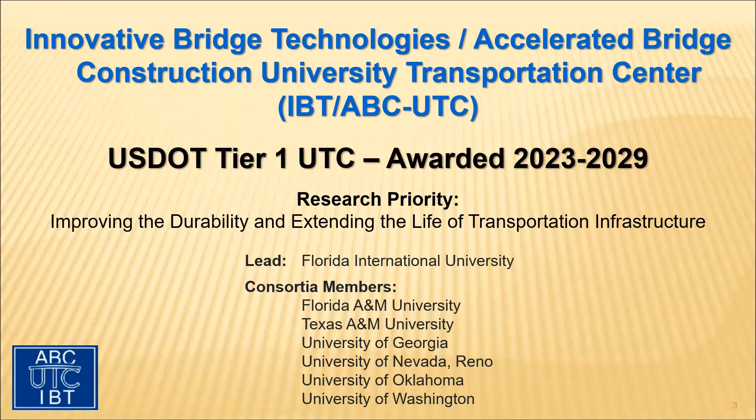Thank you, Mary Lou. It's truly been an honor and a privilege to be joining the UTC. I'm really looking forward to working with Atorod and his all-star team. It's going to be great people to work with. And I want to really thank Mary Lou. I can't thank you enough for the work that you've done on establishing this solid framework for the Technology Transfer Committee. Many of you have been watching these webinars with me for the last decade, and it's been a great benefit to so many of us. So thank you again, Mary Lou.

Today I'm standing in for Atorod. He actually had a travel conflict. Many of you who've been on the webinars for the past few months have noticed that he has been discussing the changes to the format of the ABC UTC, introducing that the IBT, the Innovative Bridge Technology, is being added to the scope of the UTC.

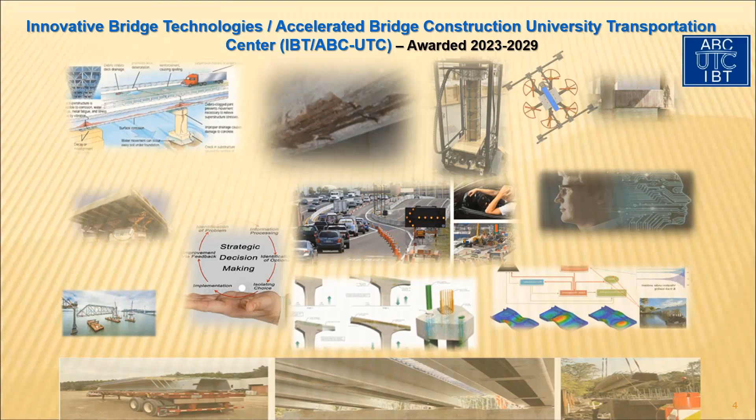In the coming months, he's going to be further discussing these changes to the format and the addition to the breadth of the scope. As you can see from many of the photos on this slide, there are some exciting topics coming up on the horizon. So in order for us to keep these webinars vital and beneficial to you, we need feedback on what you'd like to see on future webinars. If your state or organization has been implementing IBTs that could benefit others, please let us know so we can disseminate that knowledge. And if you have ideas for future topics, forward them to Atorod at the email address on the screen.

We really do benefit from getting those ideas from you, so please do send those if you have them. I'm excited to learn about those advancements and to share them with you through these webinars and also through other communications, such as the research webinars and conferences. So I look forward to working with all of you, but now I'll turn it back over to Mary Lou.

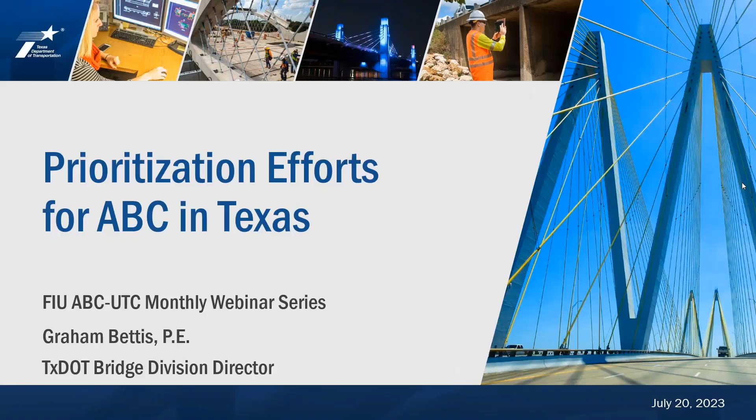So really, I just have some opening comments for the most part. Bernie's going to really get into the meat of this, but just to open the topic: the owners get really excited about breaking ground, because so much work goes into getting a project ready with utilities, environmental, design, and everything else. So when we finally get to breaking ground, that's a celebration for us. The public doesn't care about breaking ground, they care about cutting ribbons. So we've tried to find ways to get to that ribbon cutting, even on standard bridges, a lot faster than we have in the past.

We've been talking ABC for a long time now, over a decade, and I think in that time we've got a lot of momentum. There's been a lot of progress. We're doing it more often, but I think there's still a need for wider adoption, especially on more standard projects. We're not going to talk a whole lot today about lateral slide-ins and some of the really big stuff. Bernie will touch on some of it, but our focus has been on how do we accelerate pretty standard bridges, and that's been a lot of what our efforts have gone into, and even beyond our efforts, what we're trying to make policy in Texas.

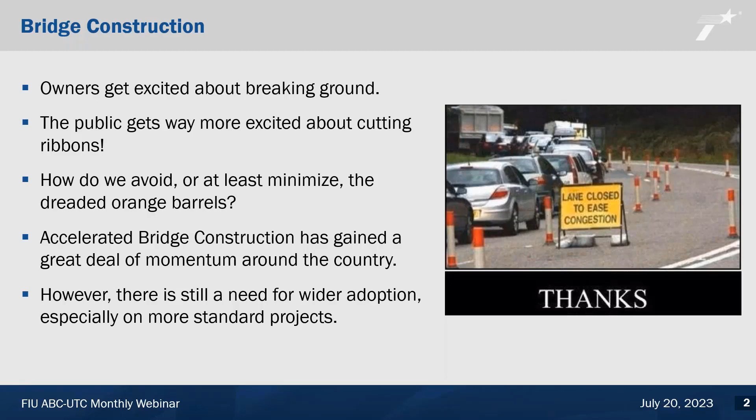So the ABCs of ABC. What are we talking about here? Speed, obviously, it's accelerated bridge construction, so that's first and foremost. We're trying to speed things up.

But I think a couple of things we maybe don't talk about as often as we should when it comes to ABC is quality. TxDOT relies very heavily on prefabricated elements, whether it's precast concrete or structural steel or whatever other widget we can make in a plant environment. We've really maximized how much we do that, and we've got really exceptional oversight and quality control in those plants, and the quality is great. Something goes wrong in the field with a cast-in-place application, it's really hard to come back, and we're forced to take something that maybe isn't as good as we hoped. Whereas in a plant-produced girder, if something goes wrong, we can scrap it and start over.

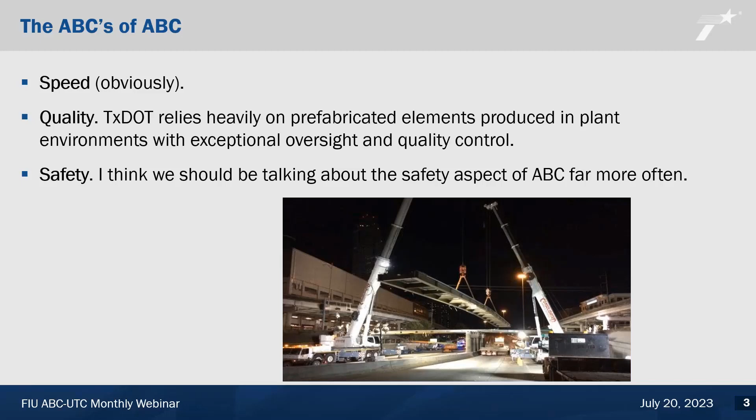And then that third topic, definitely one I don't think we talk about often enough, is safety. Everybody knows what happened with COVID—everybody decided they were a NASCAR driver, driving way too fast. And just because COVID is over, that's one of those bad habits that stuck around. People are driving like maniacs out there, and that includes our construction zones. So it's putting the public in harm's way, and it's most certainly putting the contractors and inspectors in harm's way. I think ABC should be looked at as an opportunity to minimize the amount of time those guys are exposed to traffic. That's a huge part of ABC, and we just don't talk about that aspect as often as we should.

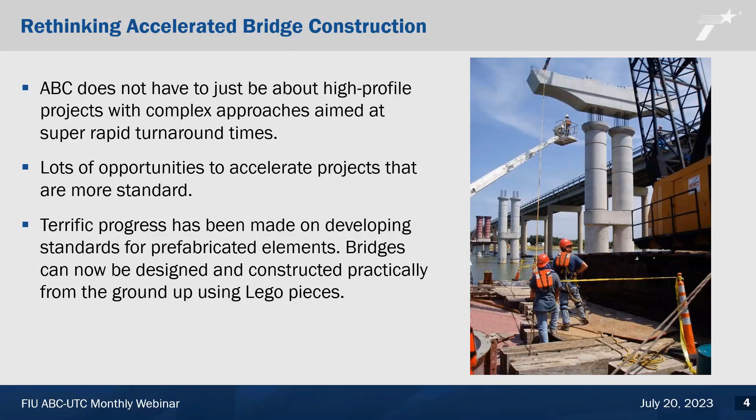Terrific progress has been made on developing standards for prefabricated elements all over the country, and we're at a point now where we can really design and construct bridges from the ground up using Lego pieces, whatever you want to call them. We've got precast column design standards underway, and we'll have those published, and at that point pretty much the whole bridge can be routinely designed and constructed using almost all prefabricated elements—primarily in Texas, that's precast. So keeping it simple: prime contractors in Texas have been very clear with us—keep it simple.

Understandably, with ABC, especially on those weekend closures or big projects, there's going to be some unusual stuff you have to do. But every opportunity we have to keep things simple, that's what we do. So even for accelerated construction, we utilize as many standard details and techniques as possible. We try not to get cute unless we really have to.

Something else we do is put alternates in plans, so we'll design a bridge 2 or even 3 ways and tell a contractor we don't care which one you do, bid it and make your decision. Another thing we do is allow contractors to come to us with their ideas. We really don't want to paint ourselves into a corner with these things.

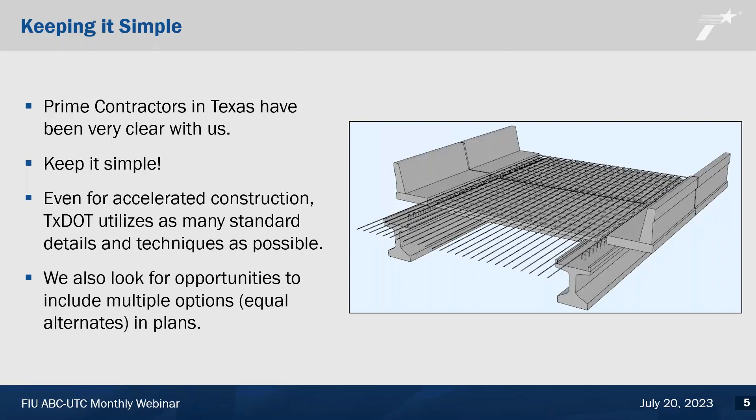A lot of times contractors will have great ideas on how to speed things up, and we want to be open to that. All right, so flipping the script—I'm not going to talk a whole lot about this because I think this is the bulk of what Bernie will be addressing, but it's interesting. I'm up in Portland, Maine this week for the AASHTO Committee on Maintenance meeting, and there were discussions this week about a couple of states that still think of ABC as just hugely expensive, and they don't do it because of that.

You know, we talked about the speeding with COVID. Something else that happened with COVID are the astronomical construction costs. The material costs are high, the labor costs are high, and the traffic control is just obscenely expensive. Just crazy what's happened with traffic control cost. So when we do a side-by-side, we're frequently finding that ABC is comparable, or in some cases less expensive. Bernie's going to show you an example today where ABC shaved millions of dollars off of one of our projects.

That second bullet—a lot of planners, a lot of owners just remain steadfast in their belief that at least one lane of traffic must be maintained at any cost. And man, it's hard to move some people off of that position. I've found it really interesting that there's a lot of cases where you reach out to the public, and they seem to be more open to the idea of ABC sometimes than owners and planners. So I think public outreach is critical.

There have been several instances where even working internally with TxDOT districts, they were very resistant to the idea, but we did some public outreach and found out that most of the time the public is very much on board with the idea of just ripping off that Band-Aid. If you can hurt them for a couple of weeks a lot instead of hurting them a little bit for 2 years, most of the time they're willing to take that couple of weeks.

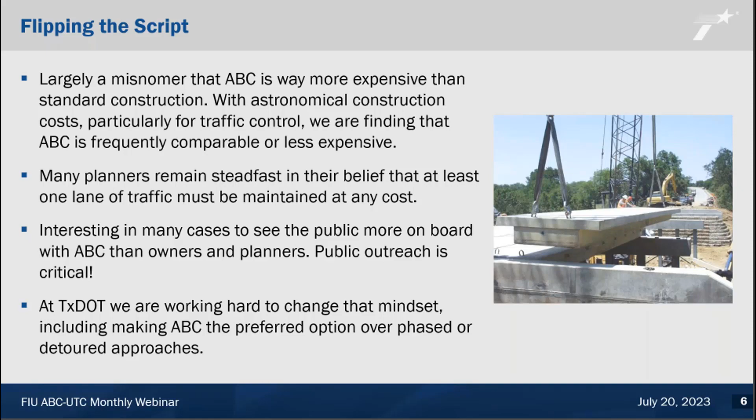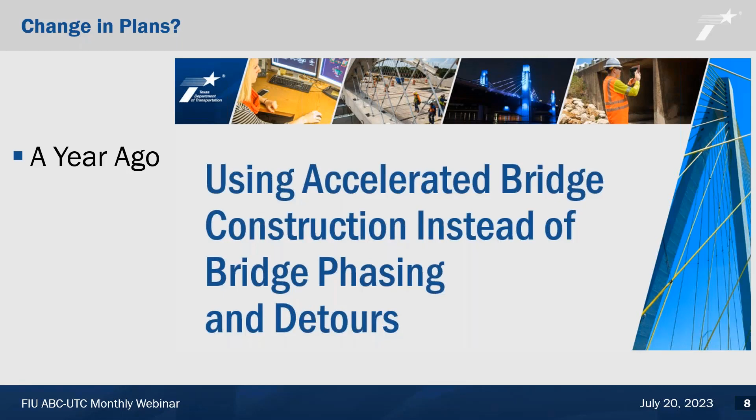So a year ago, or 8 months ago, as Graham just said, he mentioned using accelerated bridge construction instead of bridge phasing and instead of these temporary detours that we do. I would say that is definitely still the goal. I would love to get to a point where we are using ABC techniques to eliminate them altogether, but the truth of it is that we're probably just going to get to where we minimize bridge phasing and detours.

We're trying hard to identify areas where it makes most sense to eliminate these temporary detours, eliminate the phase construction, to where we can just close a bridge down completely, get our construction crews in there, have it closed, get in there with prefabricated elements and speed up construction as much as possible, but we're not there yet.

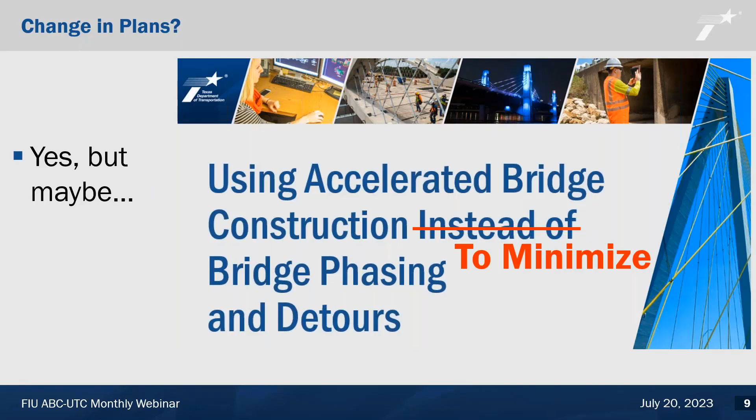As Graham just touched on, many of us are aware that temporary detours can be very expensive. Here's an example near Austin where this temporary detour is in place, and it's extremely expensive. Let me get my laser pointer here.

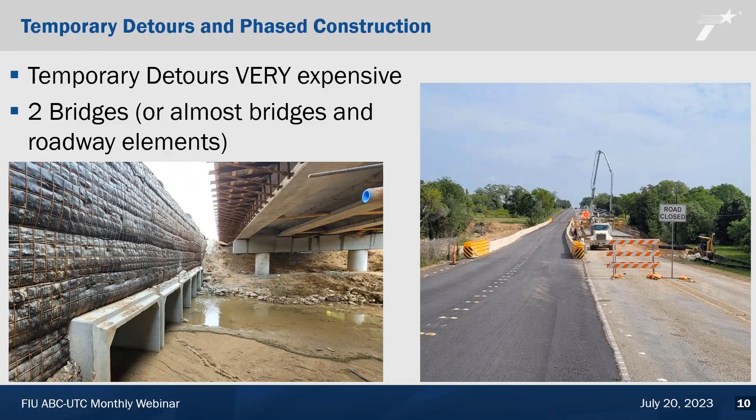We wanted to keep traffic open during construction and not interrupt traffic as much as possible, so we ended up having to create two bridge structures. We move all traffic over here temporarily during construction, build the actual bridge next to it, and later come in and tear this out. So we're essentially building two bridges, plus all of these roadway elements that transition traffic onto that temporary detour, and that can be very expensive.

Another thing Graham talked about was safety concerns. Here we have a horizontal curve that we're introducing just to get traffic off to the side and away from the construction. The horizontal curve itself is a safety concern. This is something we've been trying to communicate to our partners at the districts, and one of our districts is very concerned about it—it goes into their decision process very early in their projects. They want to eliminate as many of these as possible.

The other thing they always point out is that by doing this phased construction or temporary detours, we're adding the potential for right-of-way costs. That's adding a lot of risk to the district, and they have to build that into their project development—if we have to phase this, it takes a lot more time to acquire right-of-way, get those agreements in place, get the utilities cleared, and make sure we get the utility agreements in place. It's just a lot more work with this additional right-of-way and these phased construction temporary detours.

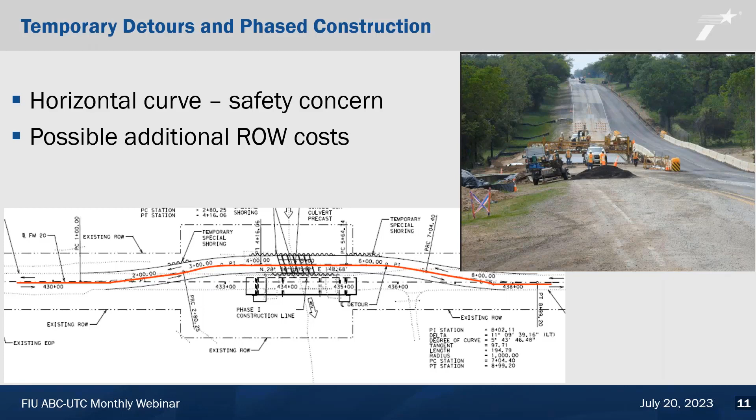So the phased construction is another way we try to maintain traffic on our bridges. It's not necessarily what we want to do, but this also creates a bigger footprint than a regular bridge—oftentimes we end up having to overbuild, building the bridges much wider than we actually need. That bigger footprint also affects how many utilities we might have to relocate, which is a risk our districts want to stay away from as much as possible. But by going with ABC techniques, we can avoid that.

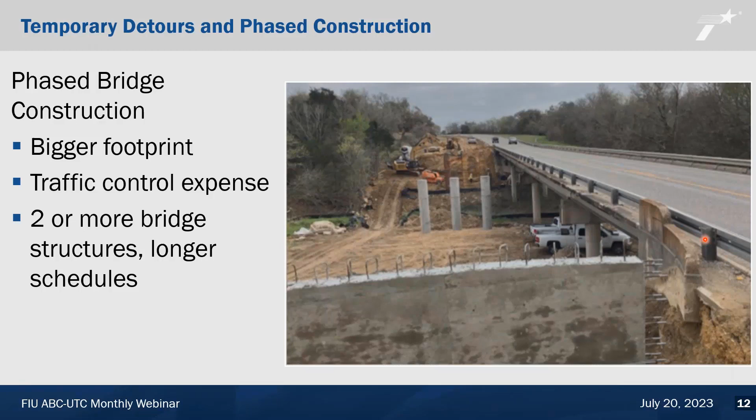Graham mentioned the traffic control expense. When we have these long detours and phased construction that extends for thousands of feet on either side of the bridge, with barricades up for months on end, that traffic control adds up quickly. We're also having to build two separate structures—here's the original structure, we come in with a second structure, then demolish the first and build the second. So we're having traffic control times two, which is something we're trying to eliminate in Texas as much as possible.

One of our districts brought up to me, while I was doing legwork for this presentation, that one concern they have is ride quality—they're afraid there will be construction joints and the ride quality won't be there when we finish the project. From the bridge standpoint, we haven't necessarily seen that on these projects, but it's a concern our districts have. We're definitely going to listen to them, and if it nudges them into the ABC realm even more, that's even better news for us.

But on another note on the safety end, there's the issue of narrow lanes.

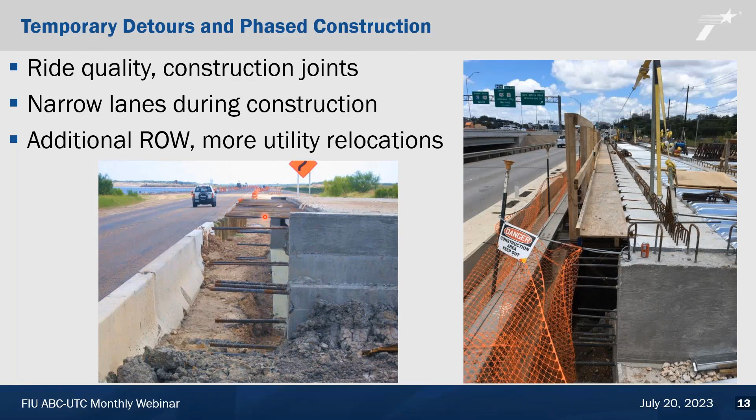And I've already touched on the additional right-of-way and relocations, but that's a much bigger consideration in these metropolitan areas. Here we have a more urban, metropolitan area, whereas out here it's something that can be more easily done.

So how do we get past that? We do ABC, right? You know, absolutely, that would be what we'd love to do. And what does that look like? Everybody always thinks of these big projects where you just move in these big bridge elements, and that's just great. We would love to be able to do that. I would just say that it's not something we do as often in Texas.

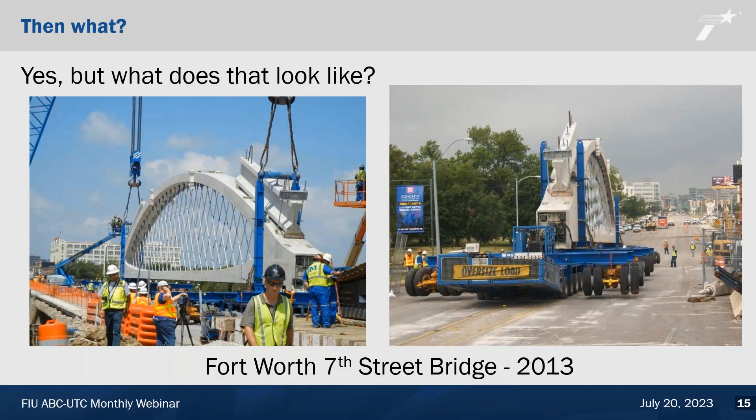This one, another one, is in Texas, but this is what we often get as a first impression from all of our districts, and even some of our staff here. When we mention ABC, this is the first thing they think of, and we're trying to change that mentality. Like, hey, look, this is great, but this is not necessarily all we are wanting to do to accelerate construction in Texas.

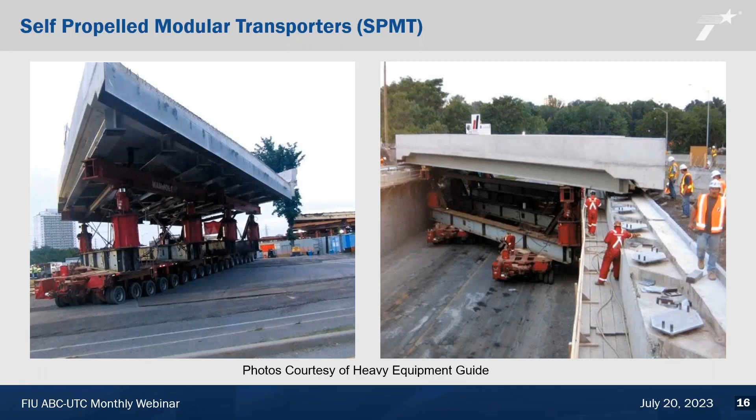West Dallas Street in Houston. This is an example of one we did back in 2016. We had a bridge get hit in downtown Houston. We had to close the bridge, it was so severely damaged. It ended up being that bridge was a major route that was going to be used by law enforcement and major other security people for the Super Bowl that was going to be held in Houston in February of 2017. So they kind of came to us, and I won't say a panic, but yeah, maybe it was a panic, wanting us to, hey TxDOT, is there a way you can get this bridge repaired and opened back to traffic before the Super Bowl is hosted here in Texas?

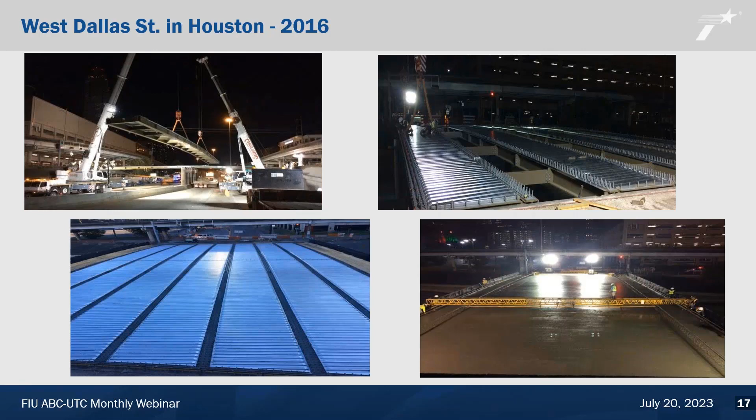And to the credit of the Houston district, they stepped up and worked with our office and a lot of partners - our office, construction, the city, our contractors, fabricators, to get this going. One of the things we did is modular construction. We went in there, and over the course of a few weeks we were able to remove the old structure, come in with these modular pieces, shut down the traffic underneath completely, reroute to another major highway, and get this thing replaced fairly quickly.

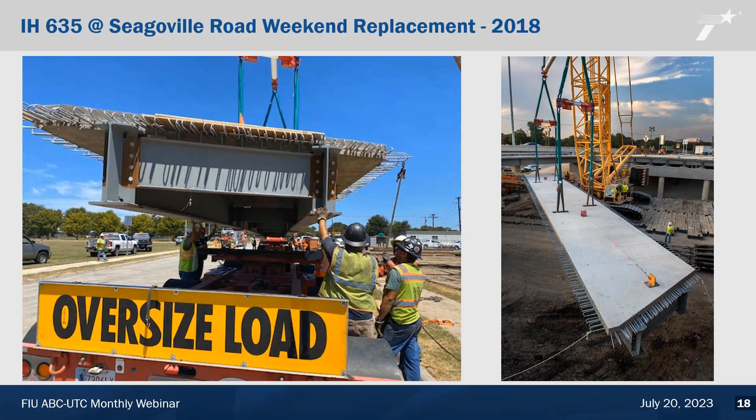I-635 up in Dallas at Seagoville Road. This bridge was another one that was slated for replacement. There were a lot of issues with the bridge that we needed to address. This bridge was going to be a big headache for everybody. This was another one that when we talk about ABC, these make an impression on people - this is the first thing they think about, these big modular bridges. They're great, absolutely they're great, and we're very proud of them, and we want people to think about these, but that's not the only thing we want them to think about. For that bridge, construction time was originally estimated to be 20 months.

That was going to be painful.

Graham and a few other people from our office saw that and said, hey, why are we doing this? They went up to talk to the district engineer and proposed the idea of a few weekends of closures, being able to move this thing in quickly with modular construction, and they were on board. We did a lot of outreach to the public, and the public was on board too. It was great. The construction time went from 20 months down to just 2 weekend closures.

We were able to get the whole bridge replaced. There was a little bit of legwork up front. We had to do some work on the substructure to prep it for the new superstructure. That's not included in the 2 weekend closures, but I'm talking about how this affected traffic. It went from 20 months of affecting traffic down to just 2 weekends.

The cost went down from 11 million to just around 6 million. How do we do that? That was the less phasing.

The traffic control on this thing was just astronomical. It was 20 months of traffic control, with lots of weaving in and out of different routes through there. There was a lot going on with that traffic control. It was a complex area.

We were also able to cut out the temporary retaining walls. Those retaining walls we were just going to use during construction, and after we got done and had the new bridge in place, we would have had to go in there and tear out those retaining walls. So we were able to eliminate that completely.

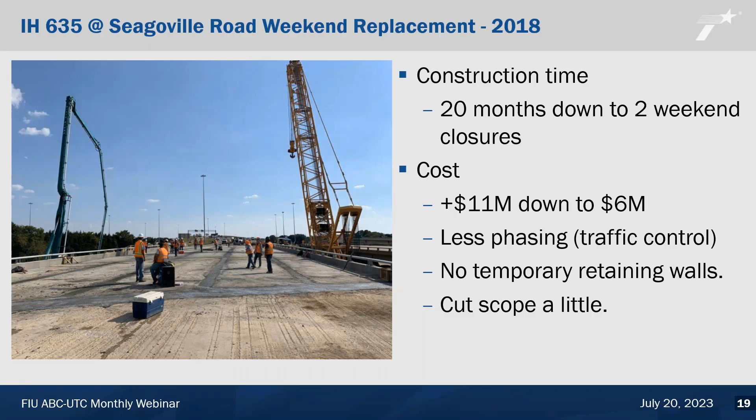The other thing is, in full transparency here, we did have to cut the scope a little bit. We didn't go back with the ultimate bridge that we wanted to go with, but hey, it worked out really well for us. We just checked on this bridge a few weeks ago, and it's looking great. We're going to maybe do a little bit more preventive maintenance on it, but it's working great.

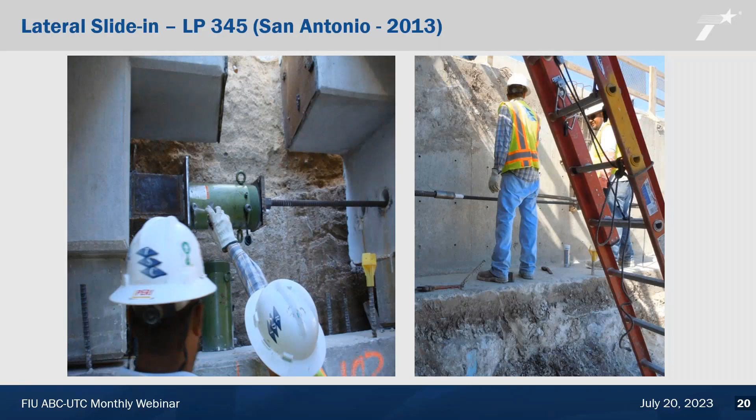Down in San Antonio, we had a lateral slide on Loop 345. This is another one. Everybody always thinks about the big moves, the big bridges that we just slide in and can get in and out on a weekend, which is great. We do want people to think about that, but it's not necessarily what we're going to be doing everywhere in Texas.

Like I said, weekend or weeks-long closures are great, but they're not as common in Texas. So what are we doing? How can we accelerate in Texas? In Texas, we prioritize accelerated bridge construction by any cost-effective method. And what do I mean by that? I'll get into that in just a minute.

The big thing that we're going to do here in Texas is the upcoming policy. We're trying to figure out how we can get this on everybody's mind, how we can get this idea to be something that everybody's considering on every project. So we kind of put our money where our mouth was, and we're changing our policy. Now it's an upcoming policy that's coming up.

We just got sign off from reviewers. Our project development manual will require each project to submit a written plan to Bridge Division comparing the time and cost of full closure versus phase construction versus temporary detours. Oftentimes, like Graham was saying, the default is phase construction or a temporary detour, and then it's incumbent upon us to try to convince them to consider a full closure. We get a lot of pushback, but now we're saying, look, that's what you have to do up front to get the project started. We can then have the conversation about whether phase construction or temporary detours make sense, but full closure has to be the consideration at the beginning.

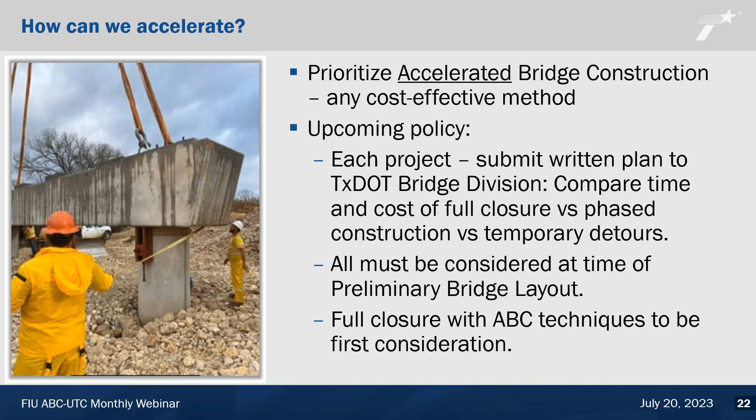It has to be considered at the time of the preliminary bridge layout. This isn't something we can do at 60% or 90% as just a checkbox, it's something you have to do up front. So full closures with ABC techniques need to be the first consideration. And what are we talking about there?

Accelerated bridge construction—what I'm showing here is precast. Graham was talking about it a minute ago. We get great quality from our precast elements, and the more precast we can do, the better in Texas. That can help us speed up construction considerably. Here, I think almost every element in this slide is a precast element, except maybe this column back here, that cap, and the existing bridge. But everything else we've got going on here is a precast element.

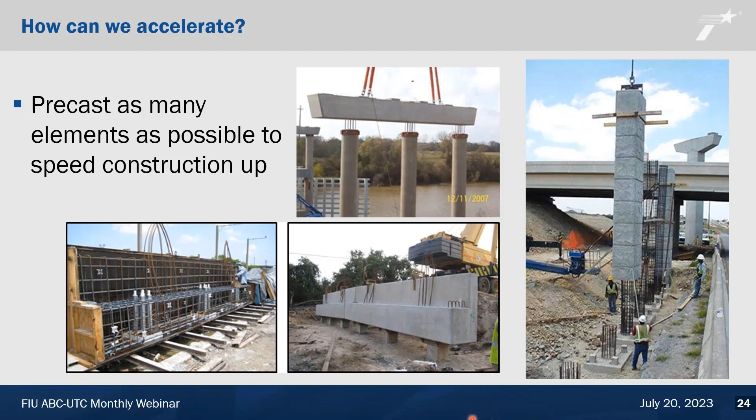So what does that mean? In other words, we're going to be building with Legos. That's something somebody said in our office, and I was like, yes, that's exactly what it sounds like. We're going to have these Lego pieces we can come out there and start building with.

Somebody else used this slide a while back. I loved it. I think it's a bridge out in Germany somewhere. It's an artist rendition, but it's great. I thought, yes, that's exactly the concept that we're wanting people to embrace and think about.

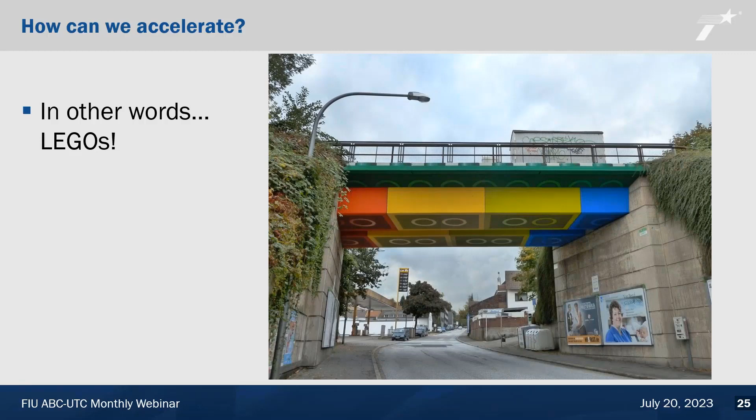TxDOT has a very mature and wide variety of bridge standards that we have. That's something we pride ourselves on, something we've had for years. And the standardization—that's something our contractors have communicated to us, and we've heard them on: standardization, as much as we can standardize things, the better. That's easy for them to understand, something they know, they can bid on it, they know what they're getting into. So we heard them loud and clear, and we're trying to standardize it as much as possible.

An example, or a few examples, of what we have in our toolbox: here we have the precast concrete deck panels. I'll point out that in Texas we do use these. These are partial depth, so here's the top of our precast concrete beam, and here's our precast panels between the bridge beam lines. We come back in with a 4-inch mat on top, and these have worked out great—they've done a great job in Texas to speed up construction.

Something else we have here is the pre-stressed beams. Something that's been around for years, but it's not necessarily recognized as an ABC technique. But hey, it helps speed up construction. We can use these pre-stressed beams and then come back in. I'm showing two elements here: we have the pre-stressed beams and the PCPs here, the precast panels. Sorry, in Texas, I'm sure other states are the same way, but we speak in our letters, in abbreviations, PCPs and stuff like that. So I will try not to do that, but I may slip into it.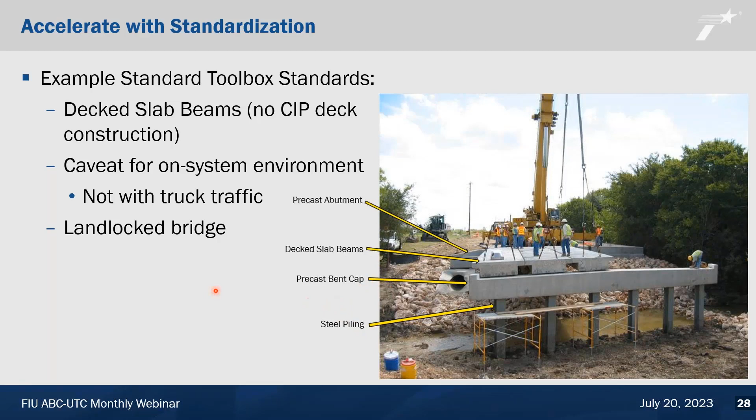So I just mentioned those precast caps. We have a standard—a precast cap standard for concrete columns, and a different one for use with steel piling. And the one thing I'll say is that we include a standard for cast in place in every one of our projects, but every single one is also sent out with a standard for these precast concrete caps, or in other states, piers. That is included in every single one of our projects. There may be some where we don't include it, but that's at the district's discretion. I'd say 95% of our projects go out with a precast cap standard in place.

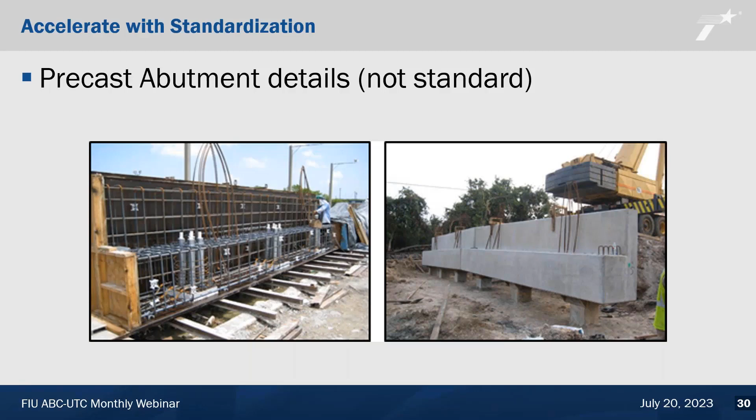Precast abutment details—we have used these on several of our bridges now. We don't have an abutment standard that's precast yet, but I think that's something we're working on. We've used them, and I would love to see this become a standard.

We make it very clear to our contractors: bridge closed during construction, see traffic control plans for additional details. That way the contractor knows when bidding this project that they don't have to bid it as phased construction, they don't have to bid a temporary detour, and they don't have to come up with that plan themselves. TxDOT has done the legwork, we're closing this bridge altogether, and the crew can get in and out and be done at their own pace.

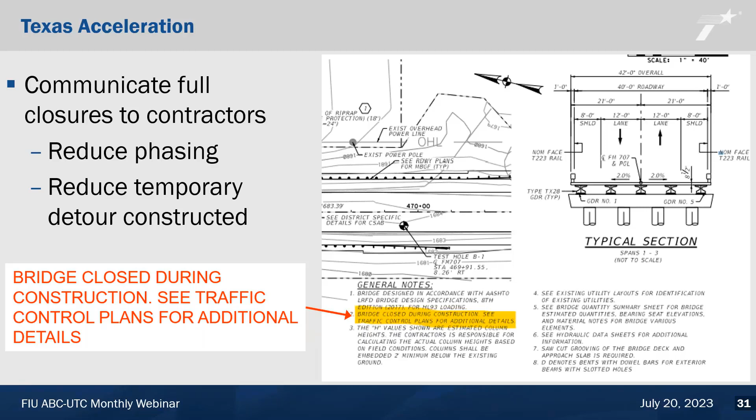So what else have we done? One thing we did here in Texas was have an innovation committee. Our design section director a few years ago started up what he called the big challenge, the grand challenge, and it morphed into an innovation committee. One of the ideas was to have these pre-topped girders. I think we heard this idea from another state at a seminar, and thought, hey, that's a great idea, let's see if we can implement that in Texas. Somebody proposed the idea, we identified a project where we could do this, and we ran with it.

An example where we did it is in our Bryan district. In 2019 we had 3 bridge replacements, all 3 of them rural, on what we call OSR, the Old San Antonio Road. There were long detours to go along with it, so we were trying to get in and out as fast as we could.

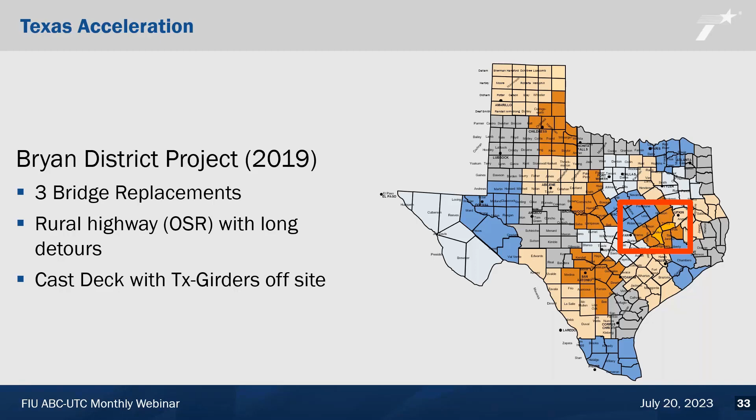On that project, we did cast a deck with the girders, and we did that off-site. So the idea was we had these pre-topped girders. We had a drop-in panel, and then we came in with the closure pour. You'll see here that we cast the rail on the exterior section as one piece, and then we came in with these panels and a closure pour.

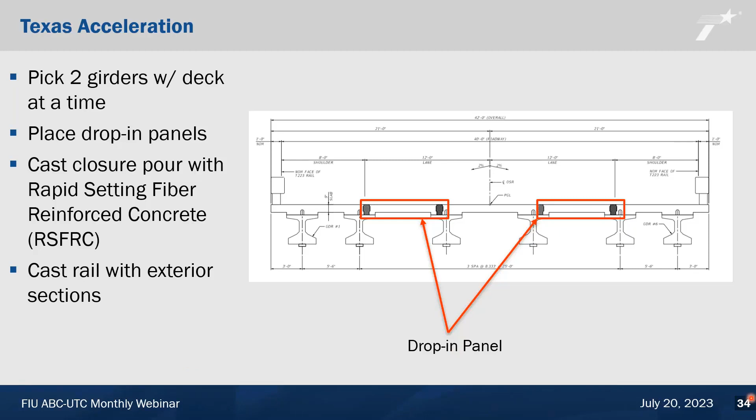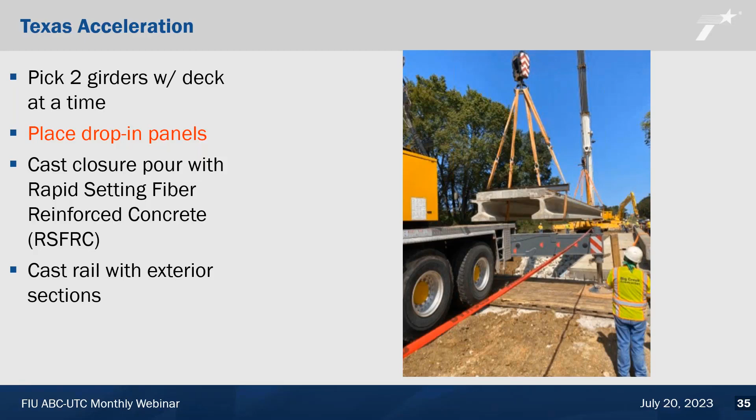For that project, we picked the girders two at a time, then placed the drop-in panels and cast that closure pour. We used rapid setting fiber reinforced concrete on this one. We gave the option of UHPC or this RSFRC, and I think on this project we went with the RSFRC, then cast that rail in with this one.

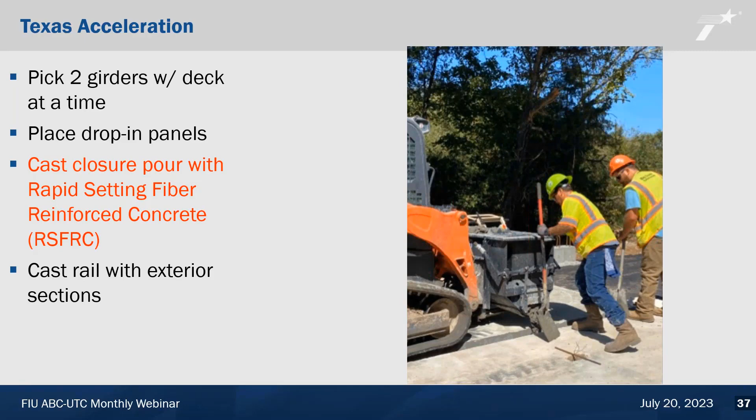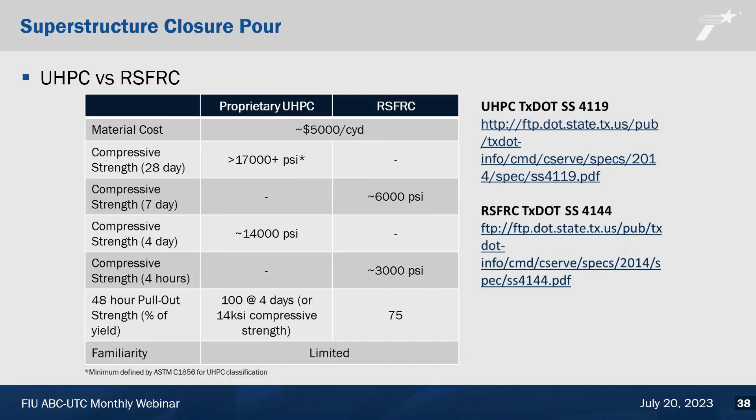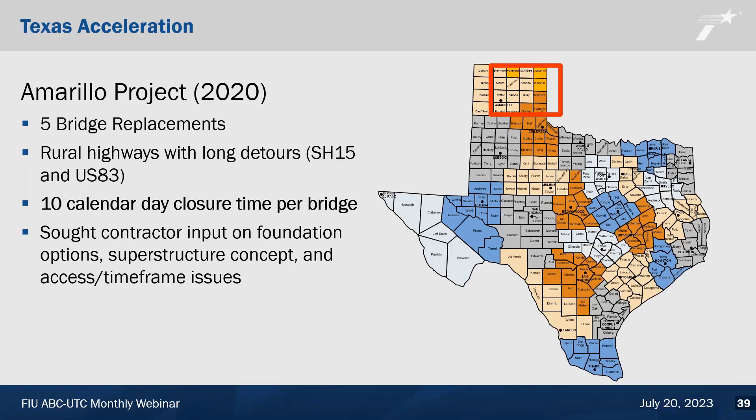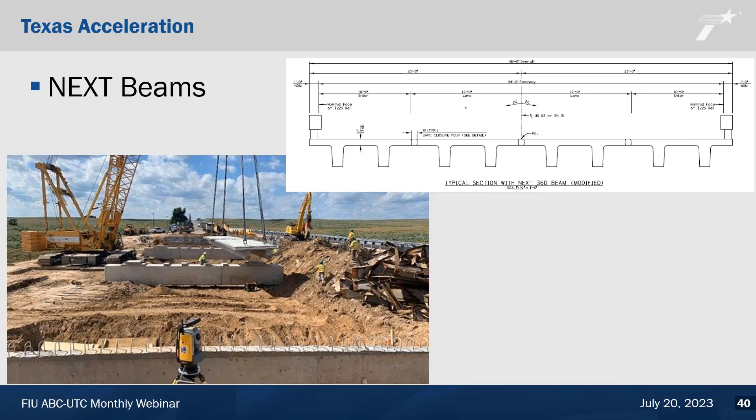We reached out to our contractors and got their input on this. Our idea was to go in there with those pre-topped TX girders, like the big bulb girder you saw on that previous project. But on this one, the contractor came back and said, hey, what if we use these NEXT beams? We said, okay, let's hear what you've got. They showed us their plan, and we said, alright, it's very similar to what we had, it meets what we were wanting to do, so let's do it. We were open to the idea, open to input from others, and we went with these NEXT beams.

On that one, the concept is like Legos. We have our precast caps, precast abutments, and now our precast superstructure. Like I said, they only had 10 days on these, so they had to show that they were going to be able to do that.

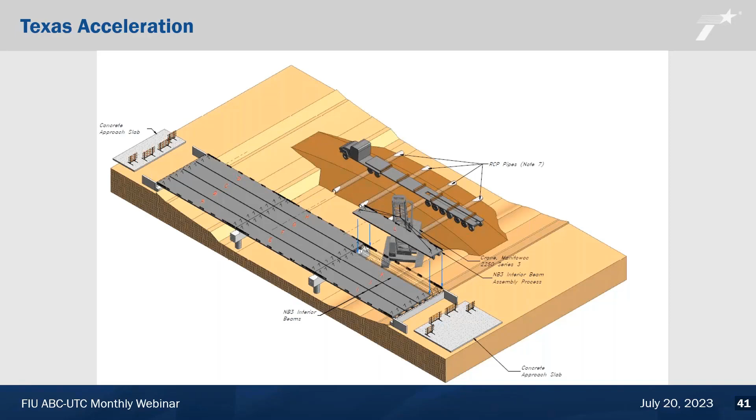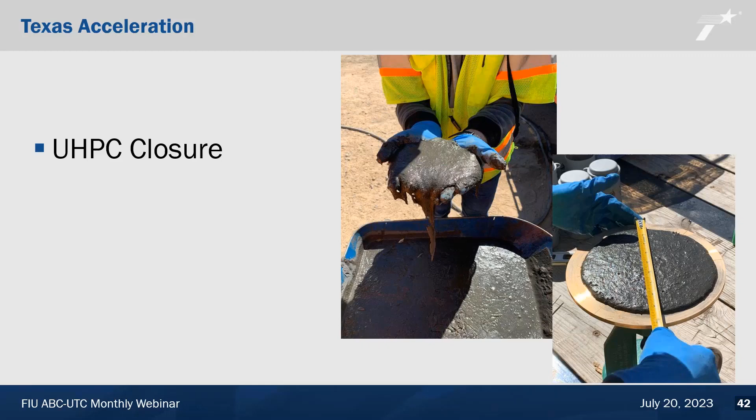The UHPC closures, we had them show that they're going to be able to do the closure pours. So we had them do this. I think the requirement in the project was 60 days in advance. They had to do a batch trial of their UHPC and do their testing.

And then, like I mentioned a minute ago, look closely. These projects, we even had them cast in that rail. This one has the rail completely there. On this one, they were confident. This is the one in Bryan, the TX girder.

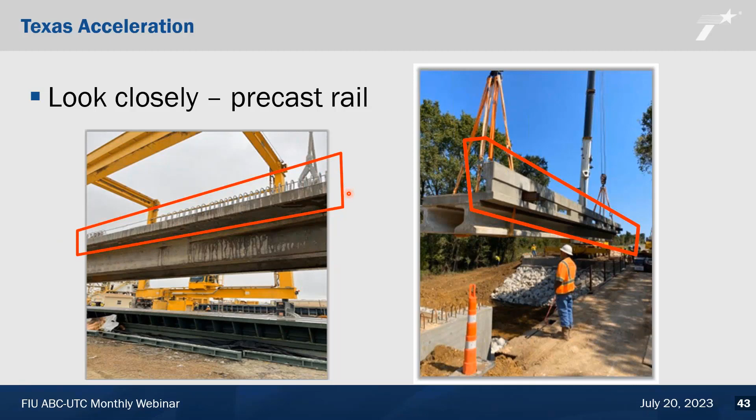This is the one up in Amarillo, the NEXT beams. They were confident they were going to be able to get in there, get out, and cast that rail in 10 days. And they did. So good on them.

So the pros and cons. Absolutely, the pros: we have quicker delivery of the final project. Overall, we have a lower impact to the traveling public and better control of our materials.

This is something I think we'll try to focus on a little bit more on our end, is the better control of the materials. We're thinking about asset management, about the long service lives we're going to have. If we can control as much of the fabrication, as much of the upfront quality of our products, the better.

The cons: yes, it will involve a full closure, but hopefully we're getting people to think about that upfront with this new policy.

Another con is, in Texas, we do have a little bit of contractor inexperience. There's not a whole lot of them that do the full closure, so they're not really sure about it. But I think once they see it, once it's communicated clearly, they're going to be on board with it. And as much as we can standardize it, the better for everybody.

We absolutely recognize this is not going to be suitable for every bridge. There will be times where we have a bridge in a metropolitan area and we just can't close it. That's a case-by-case basis we'll definitely consider, and that's a conversation we'll have with our districts. We're not going to come in and say every bridge must be ABC. It's just something we want everybody to consider.

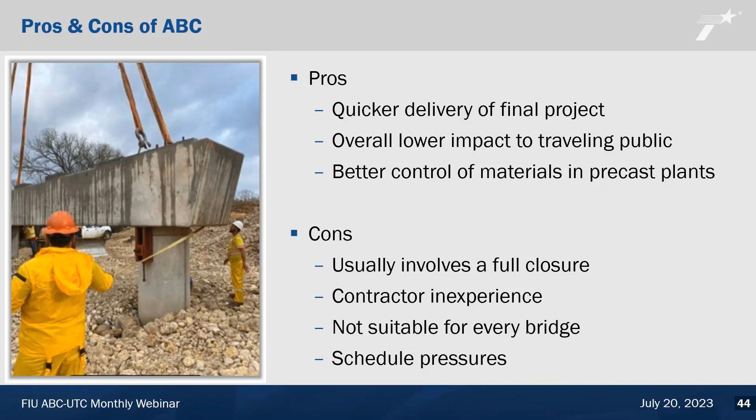And that goes along with the schedule pressures. In a metropolitan or urban area, there may be things outside of our control that require this bridge to be open, for whatever reasons. So we're definitely going to work with everybody on that.

So back to what Graham was saying earlier, the ABCs of ABC: speed. We have to work with all of our partners. We can't just come in and say, hey, we're doing this every single time. But if we work with our partners, a lot of times we can get buy-in from them.

Like here on Seagoville Road, that was something that took a conversation from Graham and our district engineer, explaining what we had in mind and what we were trying to do. It was a quick conversation, we got everybody on board, and we moved forward with ABC on that one. So working with our partners is a big deal.

The quality of our prefabricated elements, that's something I'm going to try to focus on with our districts. And then the safety—it should be a bigger part of the conversation.

We do have some buy-in from some of our districts; they recognize some of the safety aspects. It's going to be on our office, the Bridge Division office, to communicate more to districts that the traffic control, the narrow lanes, the horizontal curves, the disruption of normal traffic—these are things we need to speak to everybody about. Safety is a big thing in TxDOT.

I'm sure it's the same with every other state, that safety is the number one concern. So if we can improve the safety of our projects, I think we'll get more and more buy-in from others.

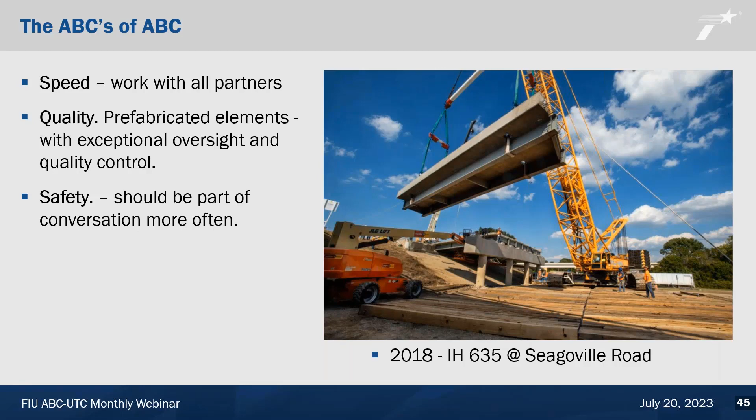And that is all that I have, Mary Lou. I guess at this point we open it up to questions, right?

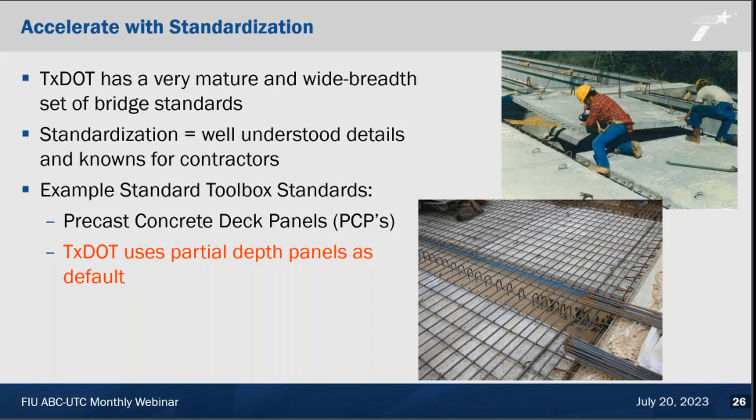The first question: you showed precast slabs already attached to the girder. Do you require a wearing surface treatment applied to the top after assembly? Most of the time we include sufficient concrete cover, and that serves as the wearing surface. We really hate putting on an overlay or anything like that on our new bridges, so we've upped the concrete cover in our precast elements and cast-in-place, and that serves as the wearing surface.

And do you grind for leveling the concrete after connection? Yes, that is something we have considered up front when doing these, like the one shown on this page. That's a 9-inch slab we're showing here, but the intent was that we'd come back in and grind it a little bit. Yeah, that's a common practice.

Great answer. Again, we have a couple of questions about cost. You already talked about cost, but what is the range of cost of ABC per square foot? That's a great question, but I don't know that we have that broken out in our bridge costs right now. We don't track ABC cost per square foot versus regular construction. I will say it's still relatively low in Texas, and that's because of our standardization - that's a big part of it. But we don't have that broken out right now. Jamal, we'll be able to answer that question a whole lot better in about 12 months after we've got this new policy in place.

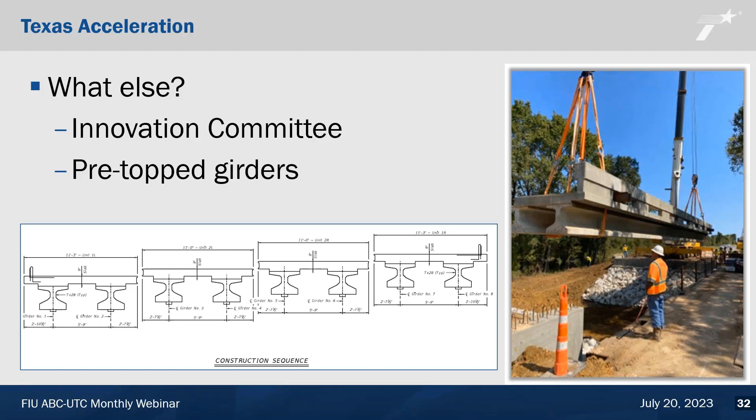Great, that's a great advancement on these pier cap connections. That's all I have, Bernie and Graham. You guys did a great job - it's great to hear from the owner perspective. Back to you, Mary Lou.